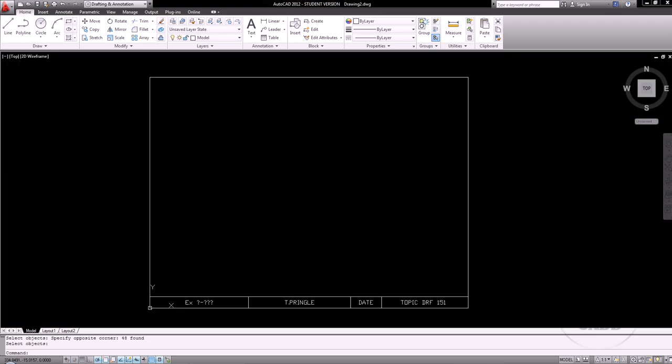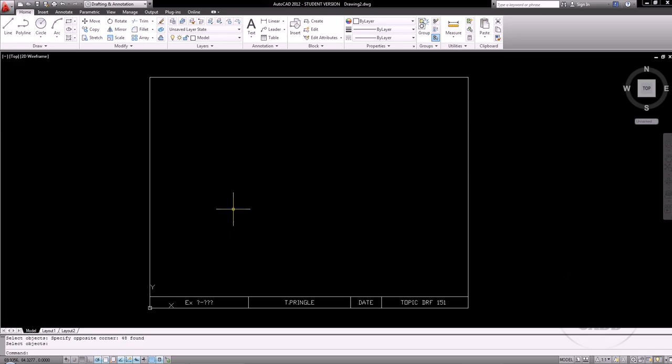In exercise 5-14, I'm going to do this one a little bit differently. I'm not going to use the box method because the box method is not necessarily going to work for this object. Because we have angular dimensions at the side, we don't know exactly how big it is. So what I'm going to do is I'm just basically going to draw the overall shape of the front view, the right side view, and then do all of my projection for the top view.

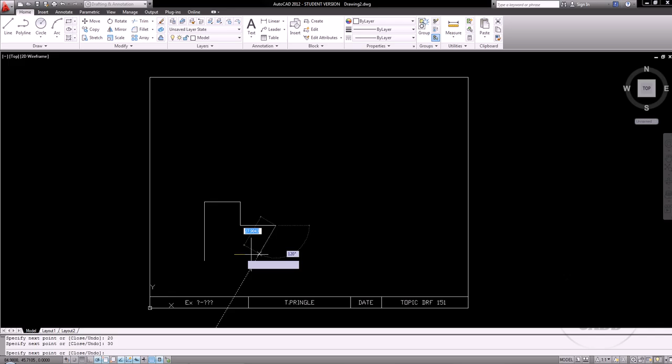So I'm going to start by drawing first a line that goes straight up 50, comes over 30, down 20, over 30, comes all the way down to the bottom, closes off. Okay, that's going to be the overall shape. Now, there's a lot of things that I need to do from this point, so what I'm going to do is I'm just going to draw my rectangle for my view spacing.

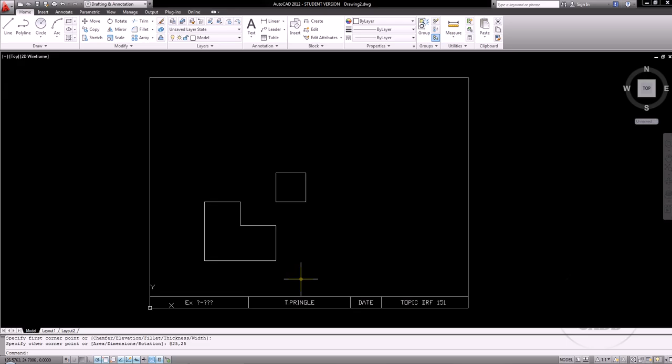This is going to be one of the first drawings that we're really going to have to work on each view as we go. All the views are going to be tied in together. There's going to be projections from one view to another view to another view, so we can't just really complete any single view before we start working with everything else. So the next thing I'm going to do is I'm going to draw a line that's going to be the left edge of my right side view, and this line is going to come up 10.

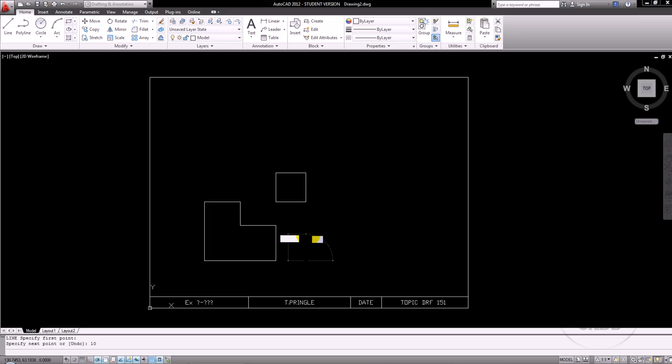Okay, now at this point, I know that I have a 30-degree both sides. That should actually be 60 degrees. So I'm going to tab, type in 60, hit enter. I'm sorry. I'm going to tab over, hit 60, and then tab back to my distance. And then I'm just going to draw this line up at 60.

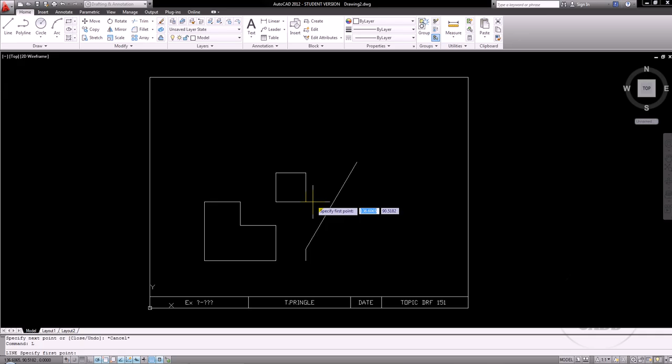From here, I can now start a new line that comes off of here. This is going to go back 15, and then it's going to go over 10, but drop 7, so that's going to be 10 comma negative 7, and then it's going to go over 9 more, it's going to come up 7 and over 10, so 10 comma 7, and then I'm just going to draw this over here because I'm not quite sure of where the end of that is going to be.

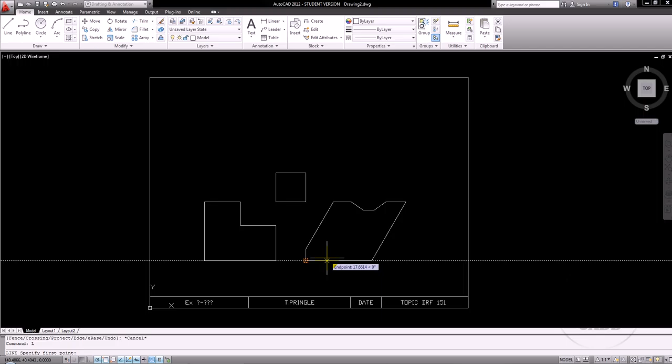Now I can draw a line from here straight back 55, and then copy this angled line from here to here. And what that's going to do is that's going to give me the rough overall shape of that view. Now I can go ahead and bring a line projected from here back 25, and that's going to go up basically to this point right here. And for some reason that's not tracking for me. There we go. And that's going to go back 20 and then close off right here. I'm going to extend these lines because I know that that edge is there. Now that's basically the right side view in a nutshell.

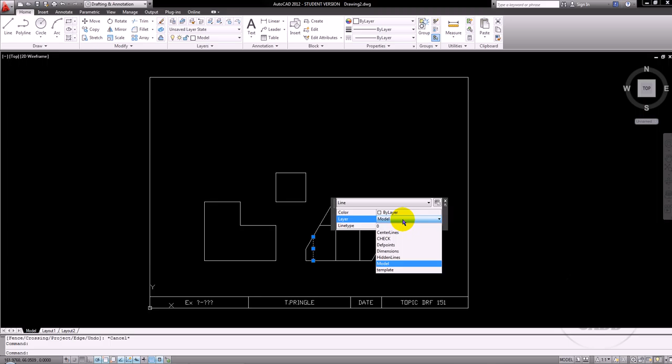What I don't have in here is the hidden line that represents the front cutout. So what I'm going to do is I'm just going to offset a distance of 6 because that's how deep the cutout is on the front. And then I'm going to extend that line up to the top. Then I can click on it and use the Quick Properties dialog box. If the Quick Properties dialog box doesn't come up, make sure that this button right here is clicked. And I'm going to change that from the model layer to the hidden line layer. And then just hit escape and that'll close everything out.

This hidden line projected with this now gives me the location for the top of that cutout in the front. So I'm going to start a new line projected off of here 20, and I'm going to go up to that projected intersection, and then I can go over 20 and straight down. So there we have our front view. I'm going to switch to my hidden line layer, and I'm going to draw a line that's going to be projected from here, which will give me the hidden line for the front view.

Switch back to my model layer, and for the most part, with the exception of one other line, offset 10 on this side, and now I'm going to use a tool called Match Properties. And the easiest way to do Match Properties is just type MA, enter. I'm going to click on the source object, which is the object that has the properties I'm looking for, and then click on the line, or arc or circle or object that you want to change. And what Match Properties will do is it'll take the two objects and give them identical line type, line weights, layers, everything. So here I've got my first two views completely done.

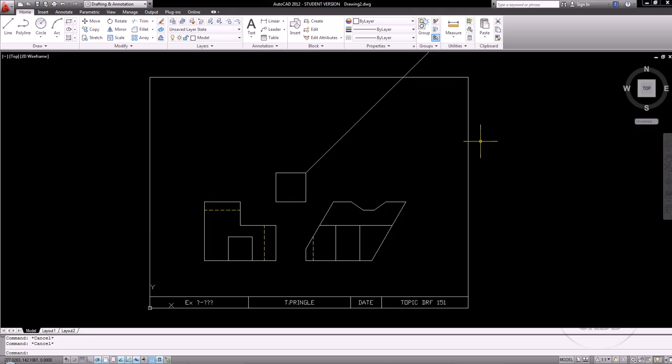Now what I need to do is draw my miter line, which is going to have a 45-degree angle. And I'm going to draw this thing up pretty far. It looks like I'm going to actually have to move this down just a little bit to get everything to fit. Now I'm going to draw a line from this left edge all the way up to my miter line and all the way over so that it sort of intersects right here.

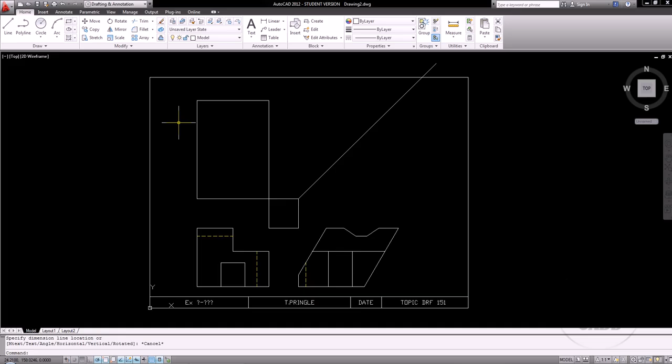What I'm actually working on is a box that's going to give me the rough overall shape of my top view. The distance, if we were to put a dimension on here, which you won't be putting a dimension right here, is going to be 83.86751346. We know that is not a normal dimension, so this will actually be dimensioned from the distance of this line and then the angle that's included right here.

Now, things we need to keep in mind: if you go back to the exercise we did several weeks ago, where we were shading and coloring things to do the hand sketching, you'll notice that if you look down from the top, you're going to see that C shape on the right-hand side. You're going to see kind of an H shape, and then you're going to see 1, 2, 3, 4, 5 rectangles. So that's what we want to focus on. We don't want to get ahead of ourselves, so we should see this shape right here replicated, and then that C shape replicated. So I want to begin building the H shape.

So the first thing I'm going to do is project up this front groove. By projecting the hidden line up and then these two lines up, we get the start of our H shape. So that's one feature, and just like with the last exercise, if you take this feature by feature, it's going to make life a whole lot easier.

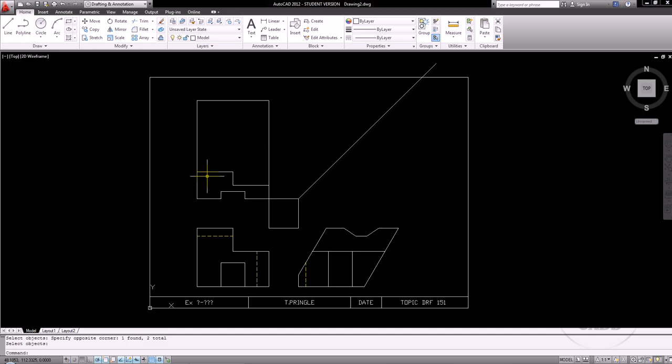Now the top of this H is right here, so if I project this up and over, and then I project this up, I get the top line for my H shape. That's not where it's going to end, but that is where it starts. So then I can project this up and draw this piece here over, trimming out the middle. And then we'll trim out and erase the rest of our projected lines. So now you can see I clearly have my H shape right here.

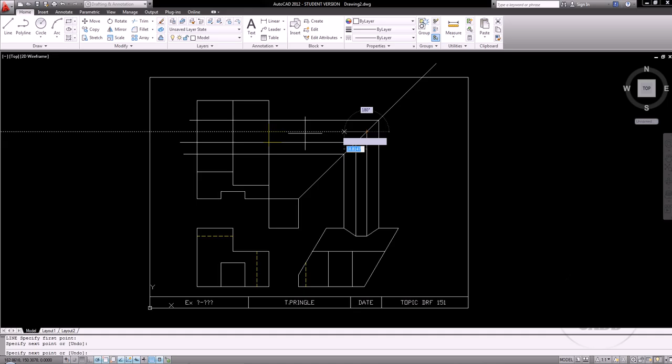Now I can project all of these other lines up and over. You can do this part dimensionally, or you can do it using projection. I'm just going to use the projected method. So now I can draw this all the way to the back here. I do need one more line. I forgot this one here, so I'll place that up there, and now I can trim out and erase everything I don't need. So now we can see these are all of those rectangles that we would see from the top view.

Now I've got to keep in mind, since this is angled, the right side of this doesn't go up as far as the back side, so I need to project this over to here. And that's actually going to be a spot where you don't see anything. So now I can erase these.

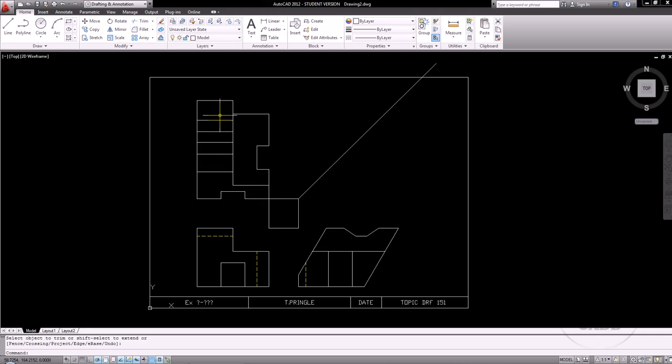That C shape, again, I can do this dimensionally, or I can actually lay it out. I'm going to lay it out by bringing this over to here. And once I have this piece, from here on out, I can pretty much do this dimensionally. This will go 10, 20, back out to the edge, and now I can erase these two lines and trim this section right here out. So here I've got my C shape. Here I've got my 1, 2, 3, 4, 5 rectangles and my H shape.

The only thing I'm missing from my top view right now is this bottom edge. So I'm going to switch over to my hidden layer, project this line here up, and draw in that hidden line, because this is going to represent my bottom edge. So you can see the top view, which looks to be the most complicated view, actually only has one hidden line. Everything else is going to be visible in that view.

So here we have our top, our front, and our right side views of exercise 5-14. And again, make sure you center this thing up, put all your dimensions on it, and then go ahead and turn it in.